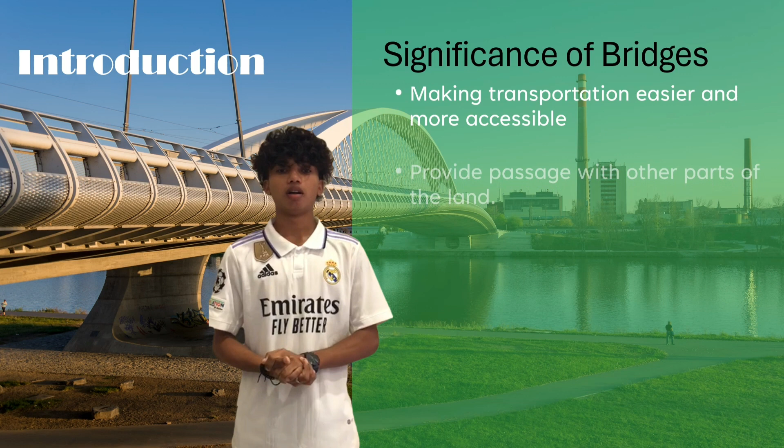Moving on to the introduction, the significance of the bridge consists of several points. I'm going to highlight a few. It makes transportation easier and accessible, provides passage with other parts of land, connects people, opens new possibilities, enables movement of people, goods and ideas, and last but not least, it symbolizes connection and unity.

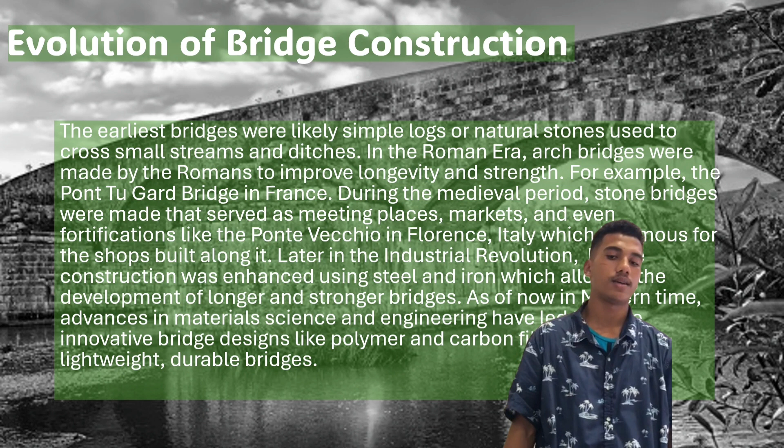Moving on, evolution of bridge construction. The earliest bridges were likely simple logs or natural stone used to cross small streams and ditches. In the Roman era, arch bridges were made by the Romans to improve longevity and strength, for example, the Pont du Gard bridge in France.

During the medieval period, stone bridges were made that served as meeting places, markets, and even fortifications, like the Ponte Vecchio in Florence, Italy, which is famous for the shops built along it.

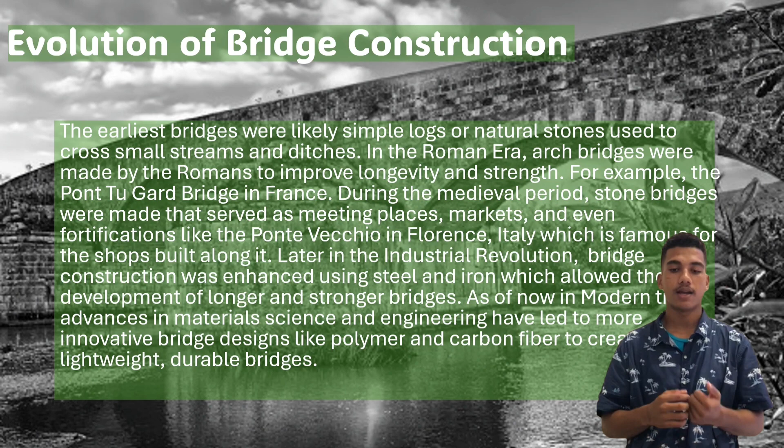Later, in the Industrial Revolution, bridge construction was enhanced using steel and iron, which allowed the development of longer and stronger bridges. As of now, in modern times, advances in material science and engineering have led to more innovative bridge designs like polymer and carbon fiber to create lightweight, durable bridges.

Construction of bridge, steps in constructing a bridge. The construction of a bridge involves several key components and techniques.

First, feasibility study and site investigation. Second, design phase. Third, obtaining permits and approvals, preparation of the site. Fifth, foundation construction. Sixth, substructure construction. Seventh, superstructure construction. Eighth, finishing works.

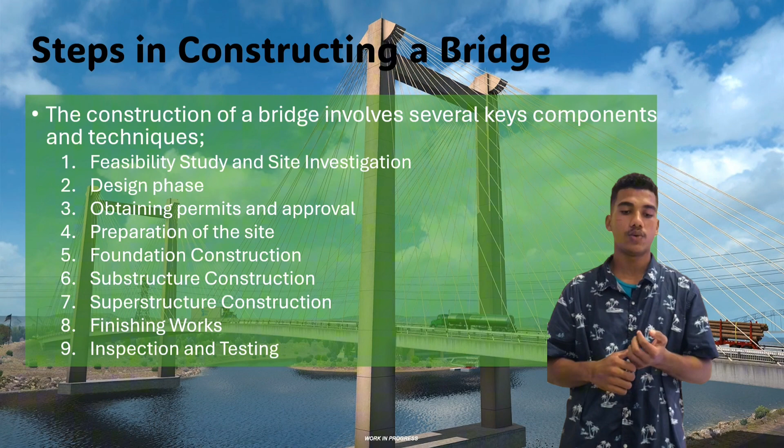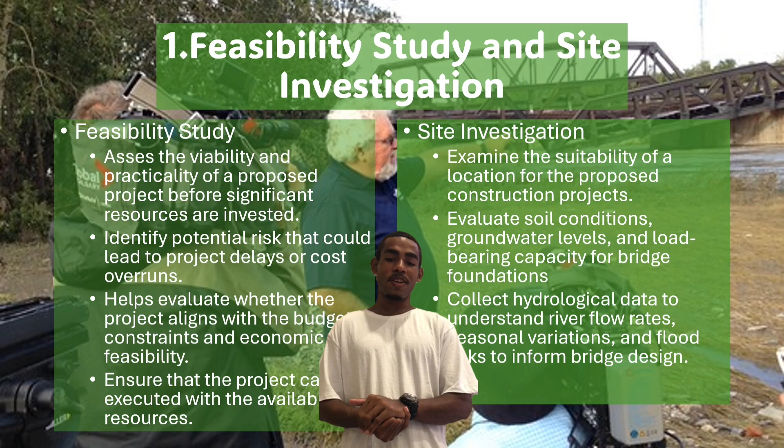Ninth, inspection and testing. Continuing with feasibility study and site investigation, there are a few points I need to discuss. One, assess the viability and practicality of a proposed project before significant resources are invested. Two, identify potential risks that could lead to project delays or cost overruns. Three, helps evaluate whether the project aligns with the budget, constraints, and economic feasibility. And four, ensure that the project can be executed with the available resources.

As for the site investigation, examine the suitability of a location for the proposed construction project. Two, evaluate soil conditions, groundwater level, and load-bearing capacity for the bridge foundation. And three, collect hydrological data to understand river flow rates, seasonal variations, and flood risk to inform bridge design.

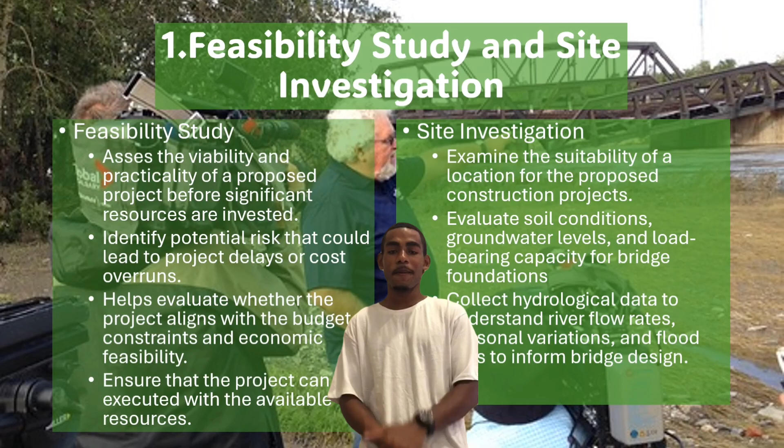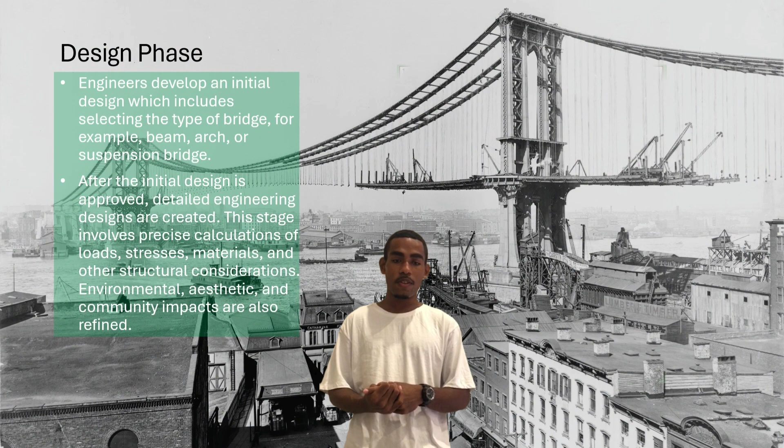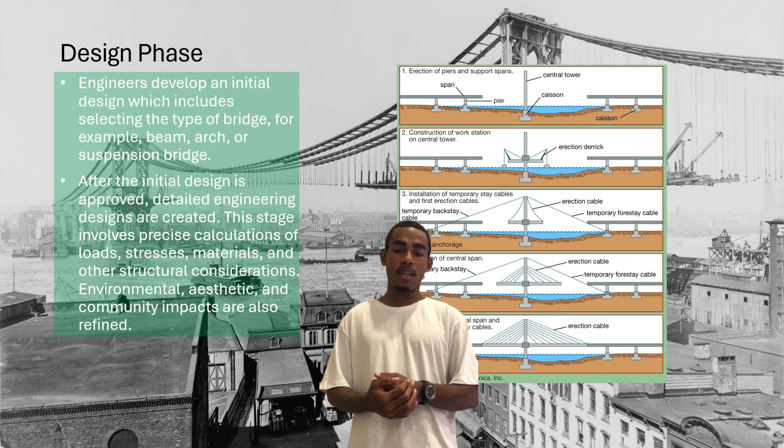Moving on, design phase. Engineers develop an initial design which includes selecting the type of bridge, for example, beam, arch, or suspension bridge. Secondly, after the initial design is approved, detailed engineering designs are created. This stage involves precise calculation of loads, stress, materials, and other structural considerations. Environmental, aesthetic, and community impacts are also refined.

Furthermore, comes the permits and approval. Before construction can begin, the project must receive all necessary permits and approvals from local, state, and possibly federal agencies. This process ensures the project complies with all environmental regulations, building codes, and other legal requirements.

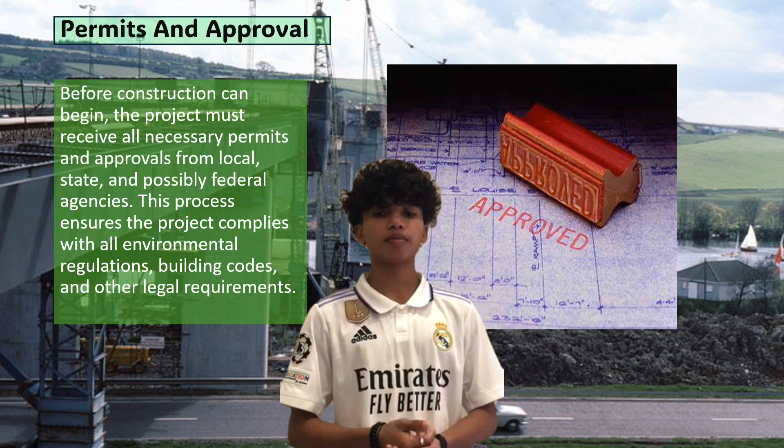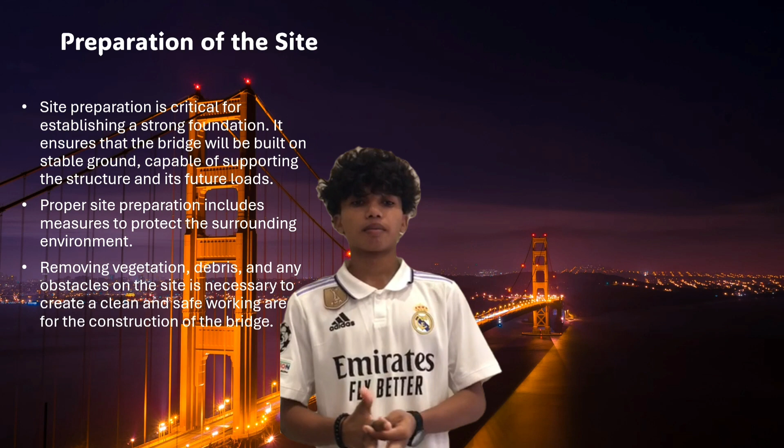Moving on comes the preparation of the site. Site preparation is critical for establishing a strong foundation. It ensures that the bridge will be built on stable ground, capable of holding the structure and future loads. Second, proper site preparation includes measures to protect the surrounding environment. Third but not least, removing vegetation, debris, and any other obstacles on the site is necessary to create a clean and safe working area for the construction of the bridge.

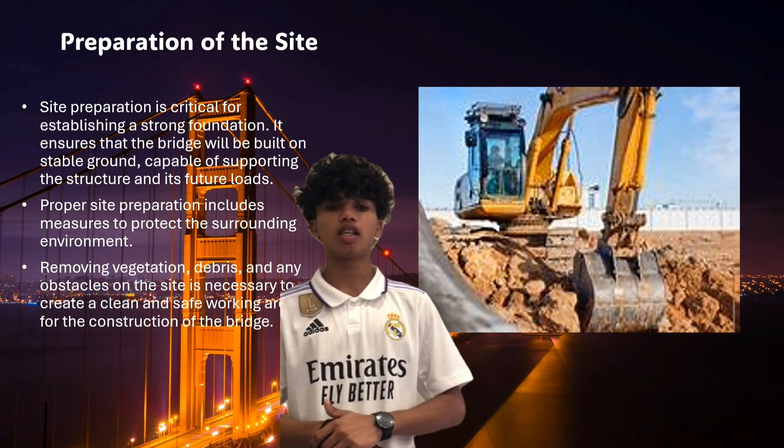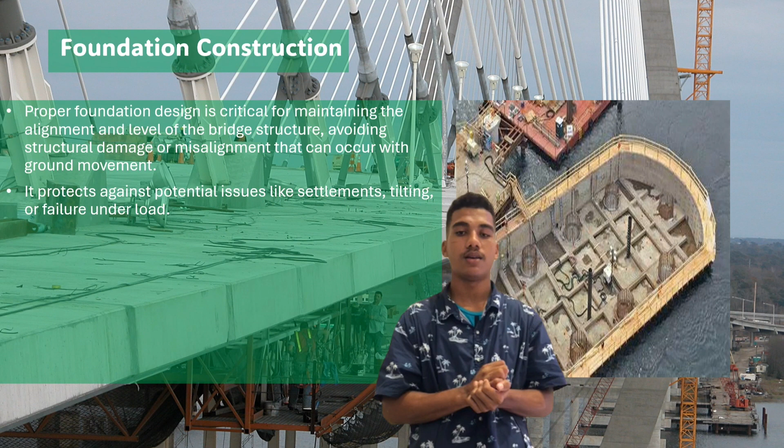Foundation construction. Proper foundation design is critical for maintaining the alignment and level of the bridge structure, avoiding structural damage or misalignment that can occur with ground movement. It protects against potential issues like settlements, tilting, or failure under load. Foundations are tailored to the specific soil and geological conditions of the site, preventing issues related to soil erosion, liquefaction, or compression that could compromise the bridge. A properly prepared foundation allows for smoother construction processes above ground, reducing delays and potential issues during construction of the superstructure.

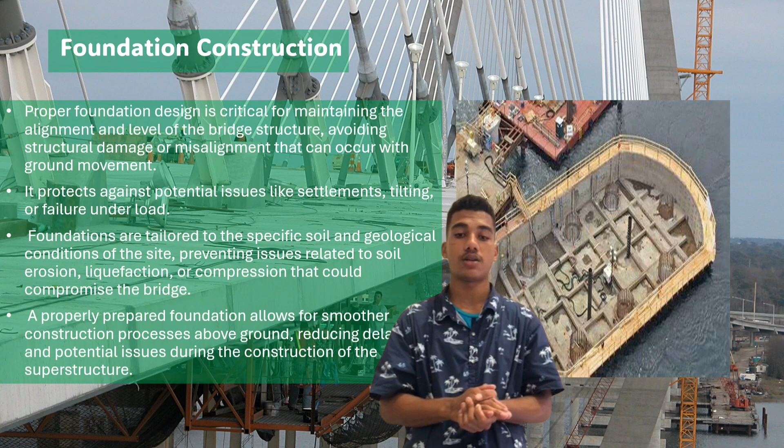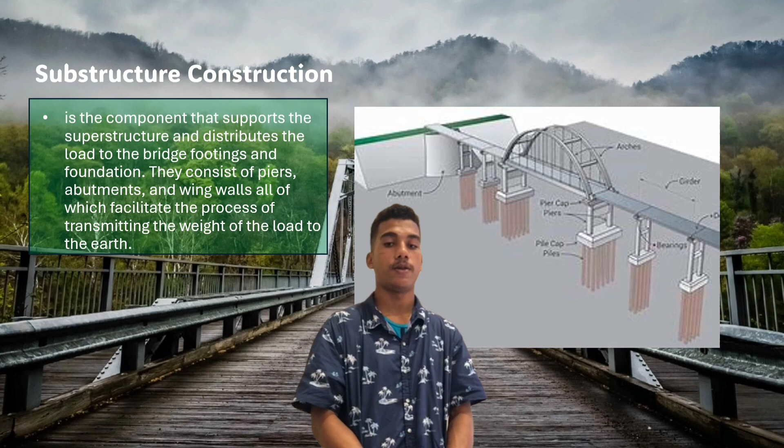Moving on to the substructure construction. Substructure construction is a component that supports the superstructure and distributes the load to the bridge footings and foundations. They consist of piers, abutments, and wing walls, all of which facilitate the process of transmitting the weight of the load to the earth. Moreover, superstructure construction.

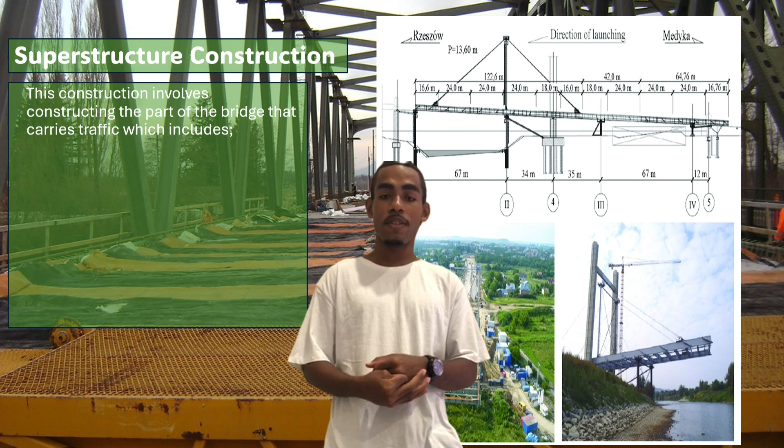The construction involves constructing the parts of the bridge that carry traffic, which includes: one, beams that will support the deck; two, constructing the surface of the bridge, which could be made of concrete, steel, wood, or composite material; three, cables used for suspension or cable-stayed bridges, which involves erecting a tower and stringing cables.

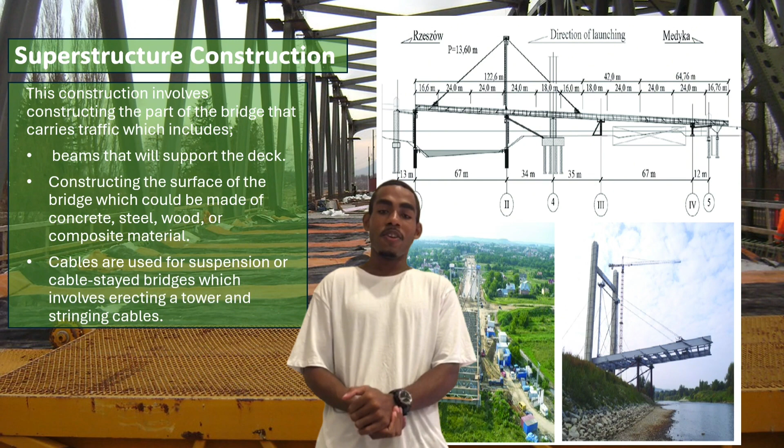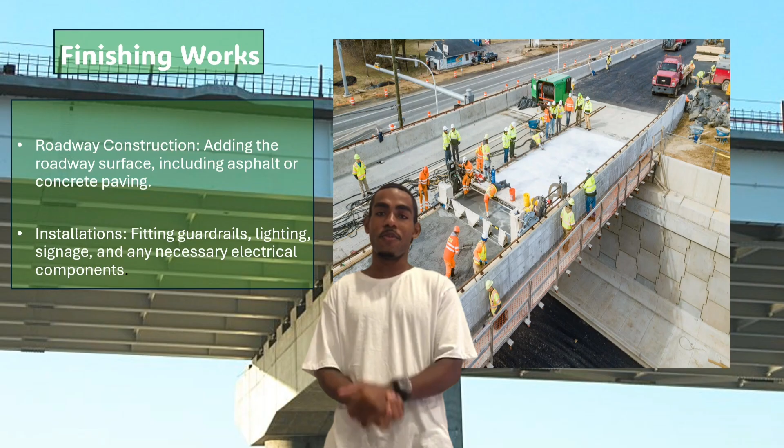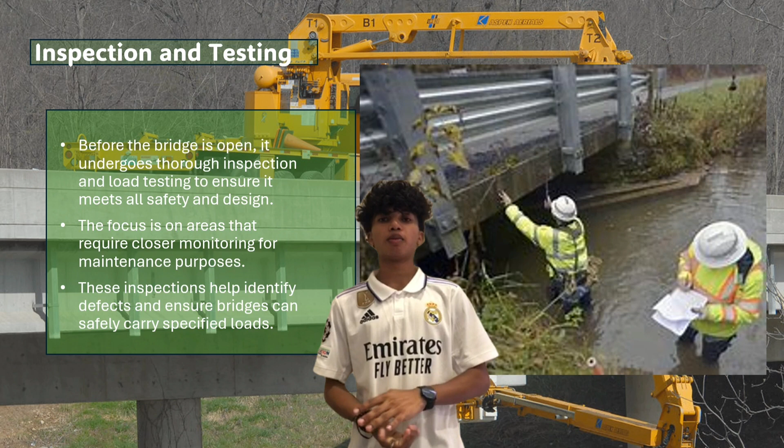Additionally, inspection and testing. Before the bridge is opened, it undergoes inspection and load testing to ensure it meets safety and design standards. Second, the focus is on areas that require closer monitoring for maintenance purposes. Third, this inspection helps identify defects and ensure bridges can safely carry specified loads.

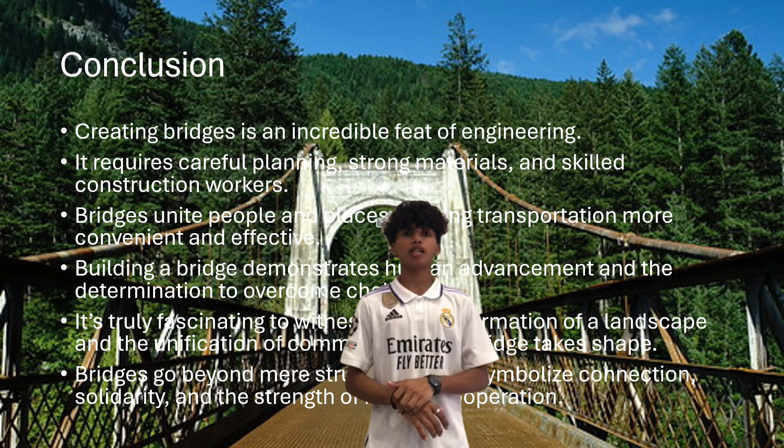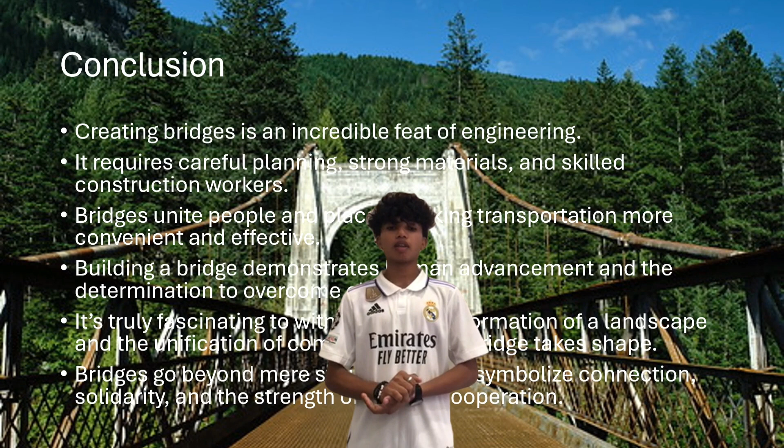It's truly fascinating to witness the transformation of the landscape and the unification it brings as a bridge takes shape. Bridges go beyond mere structure. They symbolize connection, solidarity, and the strength of human cooperation.